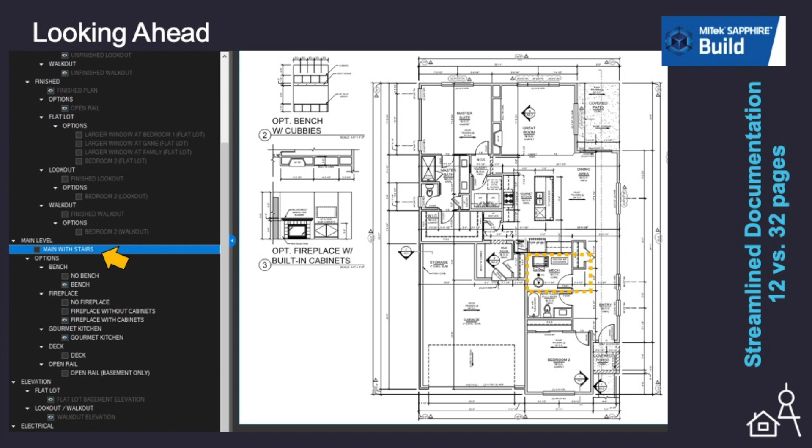With documentation, we're seeing how we can go from concept to reality change. This is a screenshot of a PDF that we create for a client that has layers built in, and the salespeople can go and turn those layers on and off for the options. And so instead of a 32-page master set, they can quickly create a 12-page site-specific set, so it's easier for them in the field. We're also seeing a lot of our clients go to the MiTek Sapphire Build software, just looking to really speed the process.

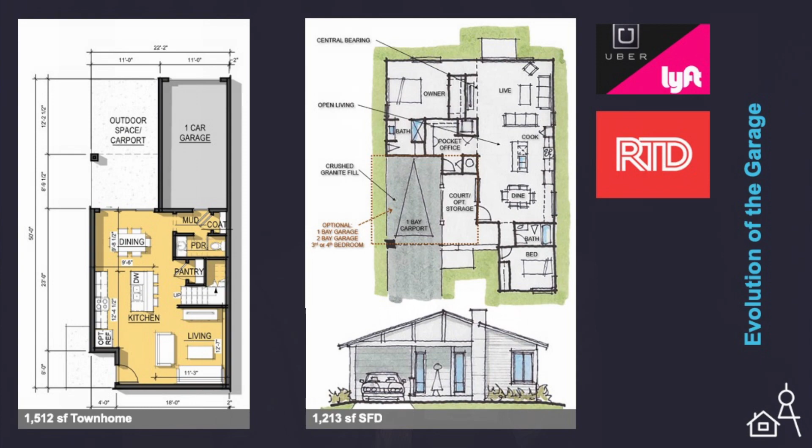The garage is changing. Here's 2 examples from our office of how that's changing. The one on the left is an end unit in a townhome, and that outdoor space can either be a carport, or it can be where you have a barbecue, etc.

Finally, solar. We're seeing solar influence our design, and it's kind of crazy. When I started this, I was like, oh yeah, we put solar panels on the roof, no big deal. Well, we work with Thrive, and they put a lot of solar panels on their roof. The one on the right is a net zero home that we did together. And you look at it, and you're like, well, there's no solar panels in that image.

Where are they? Well, when you design for production communities, you have to predetermine all the different orientations, if it's facing north, south, east, or west. And so you have to do these studies on your roof plan to make sure they're relatively even so that you can get those solar panels in each direction. And then you have to fine-tune it. Maybe that roof plan isn't a 5/12, maybe it's a 6/12 to change that valley line so that you can get enough panels in there.

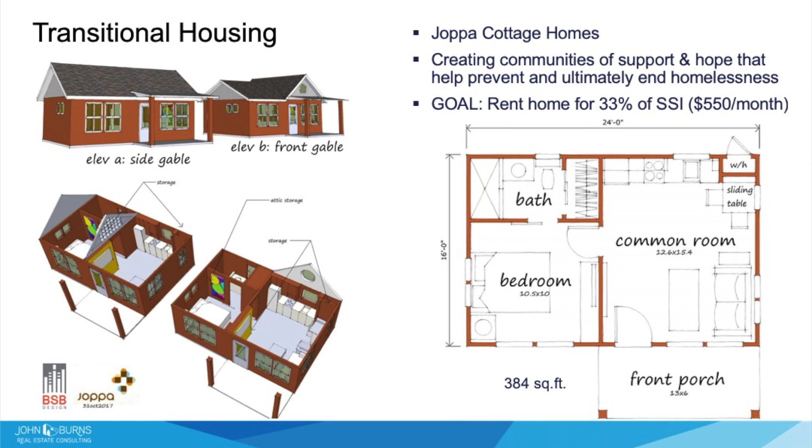You know, design for attainability at any price point. Attainable is appealing to everyone, not just first-time buyers. So we're going to talk about transitional, attached, and ADU, narrow lot, and new luxury. This first one is transitional housing. It was for Joppa Cottage Homes out of Des Moines, Iowa. We're trying to solve the homeless problem in the area.

This home is 384 square feet, 1 bedroom, 1 bath, a common area with a galley kitchen that we've been hearing about. The challenges that we had in this was zoning. The minimum lot size that the city would require was 6,000 square feet. We were grandfathered in at 5,852 because of where this lot was located. We were hoping to get 3 to 4 homes on this lot. We got 1. But after this home was built, the city is totally on board, so they're going to help us find other locations so we continue this program.

There is a gentleman that was living in his car, and Joppa had found him and moved him in. He is employed by Joppa now, and he is able to cover this rent at $550 a month. You can see the inside feels very nice, a little bit of vault ceiling in the family room, but I think very clean lines, so transitional housing.

From there, then you start becoming detached, and you're 21-foot wide, rear load garage, side yard, very open plan. What I like, obviously, about the rear load garage is your elevations can take on any character. So whatever market you're trying to reach, whoever your buyer is that you're trying to reach, you have a lot more room to be playful, and you don't have to just worry about that garage. So this is, I think, a very solid solution.

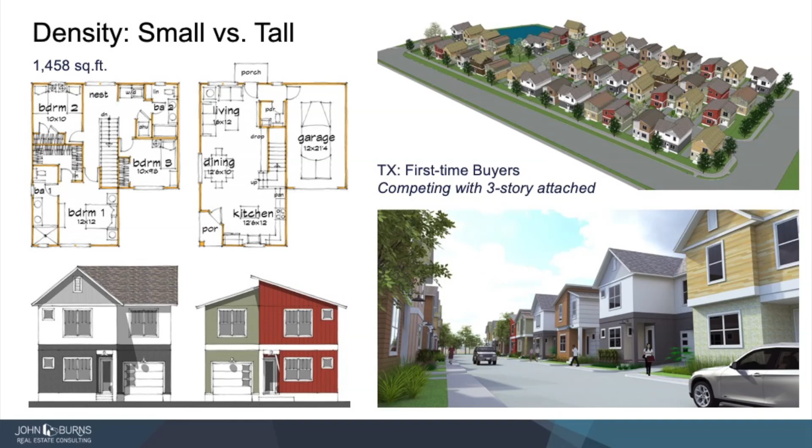So small versus tall. So this is a project where it's all 1 car, so the high density. We tried doing a no-car solution, but the focus group shot us down on that, so we're going to go back and at least do a 1 car. This is in an existing community, and there's a very good school district, so we're trying to draw the single dad, the single mom, the parent, a couple that are going to have kids into this neighborhood. Price point hopefully is going to be around the 175, 180. So this is definitely a small to tall versus tall.

Again, another way to handle that is a cluster configuration. What I like about clusters, you can kind of create a community within a community. We definitely played on the farmhouse kind of look, the open plans. You can kind of theme each cluster if you want. It's just another way to get your density up and becomes very attainable, again, depending on if it's a move up. You know, I do like the word tribe because when you always look at our thing that we're talking about, first time move up in families, you have such a huge group. It's more of a tribe of who want to be together versus just a specific buyer, if you will.

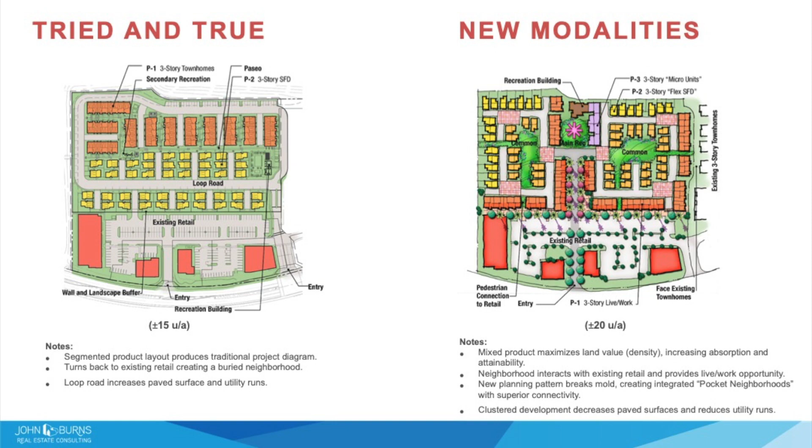So here's a little example. The image on the left, this is a townhome and a detached single-family home product in an existing infill location with an existing retail that has not been doing very well. That's one of our solutions that's being processed right now. But I wanted to look at that and see, how can we break some paradigms and shift into integrating the product together in a different palette.

So now we've introduced products that work together with each other. We've introduced a product that interfaces with the parking, with the commercial retail area. We've introduced the single families working inside the spaces around courtyards and green spaces. We've introduced a rec building that's attached to the attached building. So the net thing is we actually picked up units, we decreased the amount of circulation in the space, and we think created a much more energetic community with more vitality.

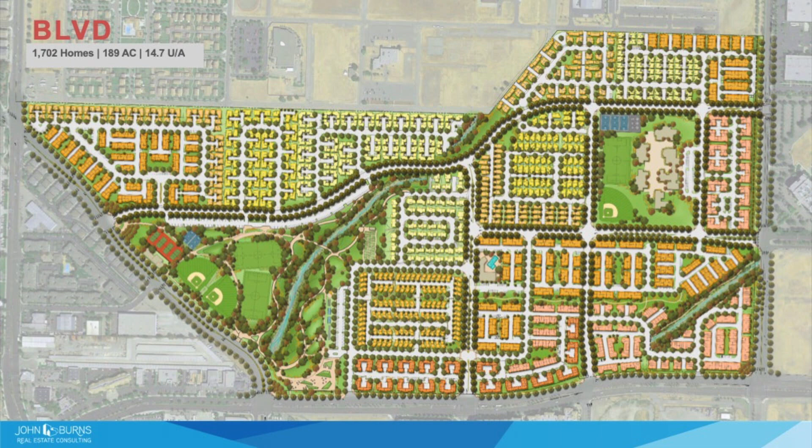This is a project that's up in the Bay Area, Northern California, East Bay. It's in a suburban city of Dublin. And this is just over 1,700 homes. It's just shy of 15 units per acre. And so this is a joint venture between Brookfield and Cal Atlantic and Lennar.

So, you know, architecture, we've talked about that here a lot. It's definitely getting more progressive, more contemporary. There's still lots of solutions where we're blending in familiar, traditional with contemporary. There's the farmhouse agrarian that we've heard a lot about, where you're taking that style and making a more progressive interpretation.

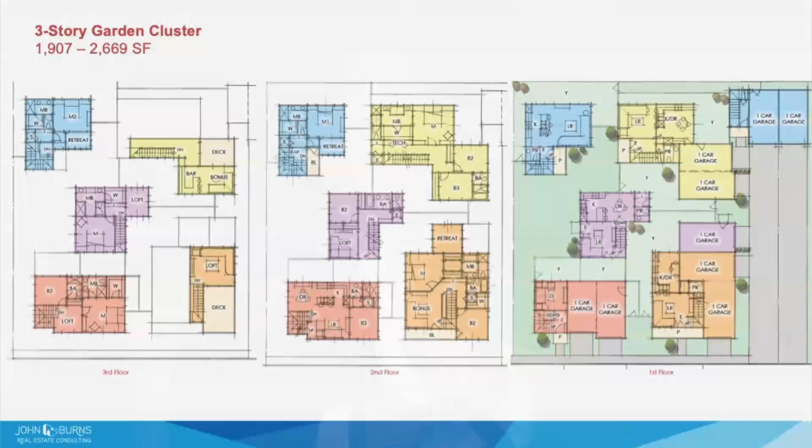This is an 18 unit per acre detached project where we push the height up to 3 stories. It can be done in 2 stories. But it starts to explore a different way of doing some cluster housing where you're starting to introduce some 1-car garages and 2-car garages. We're detaching the garages to not have them all attached, and that allows us to create some central open space, which is typically not found in a cluster environment.

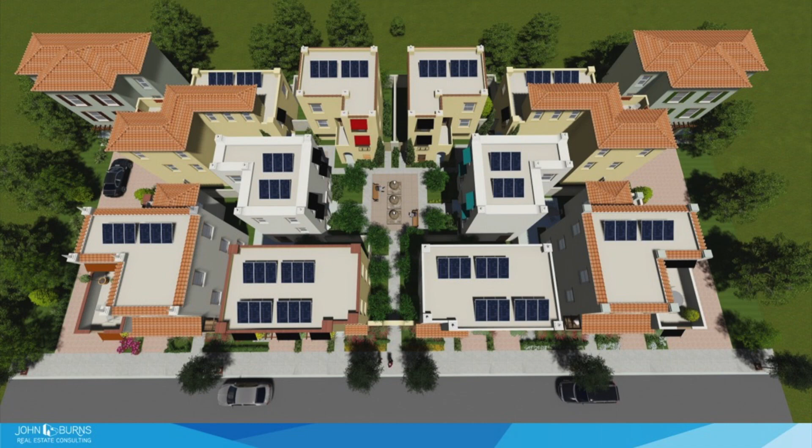And so this is kind of an above ground view looking down into how the module works. It works very well in grid-like street sections, and provides some nice living environments where you can create, again, more connectivity and enhance the experience between the users. Everybody gets a yard, everybody gets decks, lots of open space.

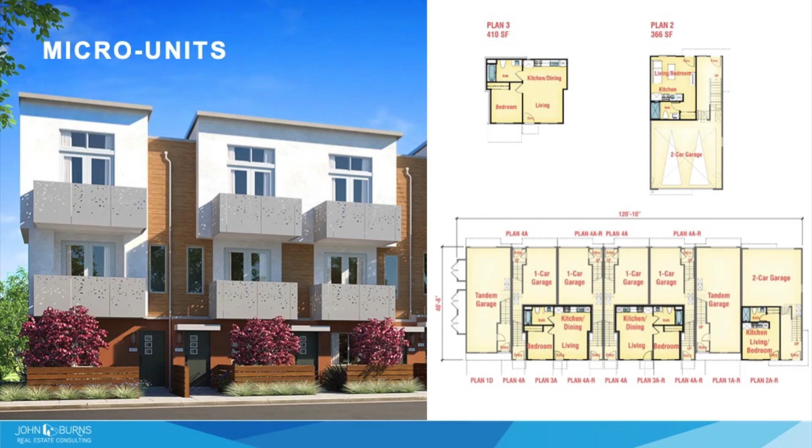So like a lot of our clients now, they're going, where do we go next? So our thought is let's go to another product. Let's pick up another unit or 2 an acre. Let's slightly reduce the square footage down. Let's go to a little more progressive architectural style. Let's address this buyer that's coming out of an apartment. Let's have universal roof lines that work very well with the solar situations.

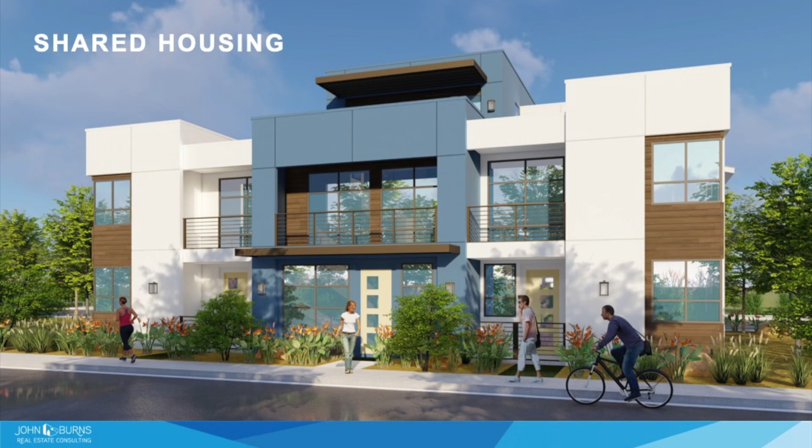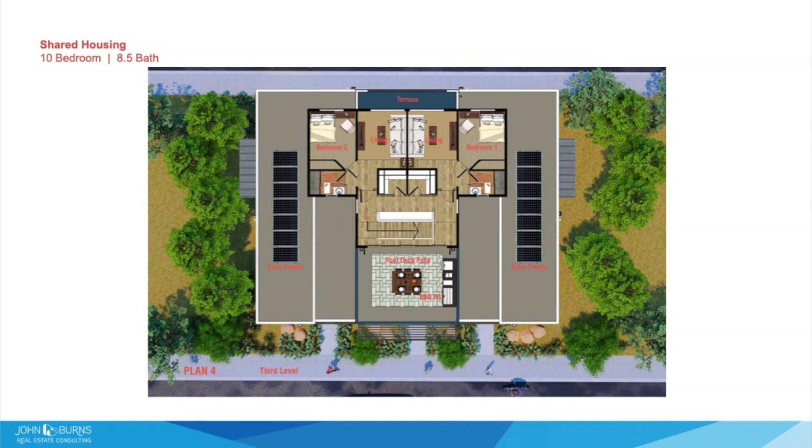And then as you go up to the second level, you have a kind of a combined fitness center, or you have kind of a workshop area for your at-home business and that type of thing. And then you go up to the top level here, and this particular person does not have a car and has just a 1-bedroom unit, and then there's a rooftop community deck.

So this concept of shared housing is getting to be quite a bit more involved in lots of our different types of projects. I just read something that came out of the LA Times. They said that there's a New York firm that is investing $100 million into the LA market for this co-housing, shared housing program. So there's lots of interesting groups out there doing this, and I think that's going to be a real interesting concept to get your price down.

You can do it for sale, you can do it for rent, you can do it for student housing, you can do it for age qualified. There's lots of different uses to do that. And so then finally, we're exploring the opportunities to co-partner with a company called Blokable, which is getting more into the manufactured housing of products.

So we came to them on a project in Palo Alto, which was a trailer park that's being condemned and taken over by the city by eminent domain. And so now the idea is that you have to move people out and move them back in. So we need something fast and quick. So this group is out of Seattle, and they build 2 modules. It's a steel frame construction. It's not wood. And, whoops, stopped.

But anyway, they're active in the for-sale market and also in the rental market. And so they build it in their factory, they ship it out, and then they have their own task force that works in the field and can treat and finalize the product. So that's pretty exciting too. So we're spending more time with alternative methods of construction, and modular is coming fast. We talked a lot about componentized framing and all that, and so that's something that we're trying to take advantage of right now. And that's it. Thank you. Thank you all.